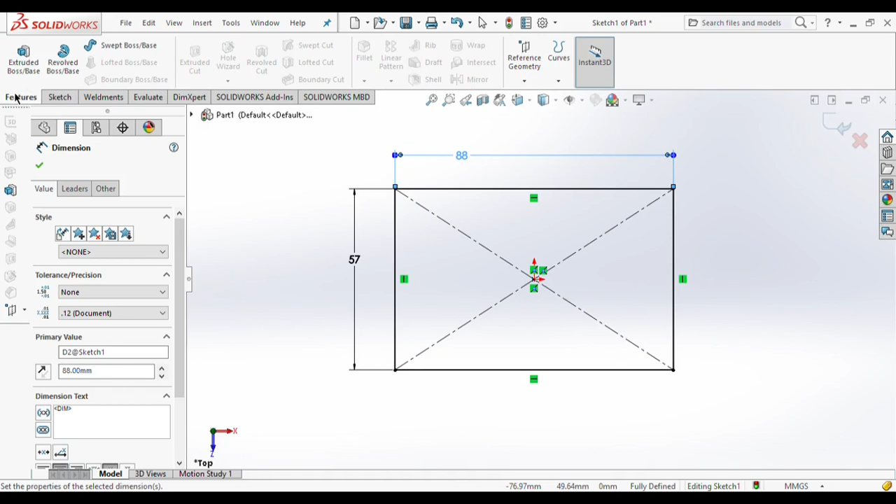Select the top plane, normal to, go to sketch option, go to corner rectangle, draw the rectangle, go to smart dimension, give this dimension as 57 mm, give this dimension as 88 mm. Now go to features option, extrude boss and extrude it up to 10 mm.

Click on OK. Now go to this surface, normal to, go to sketch option, draw two circles on this surface, give the smart dimensions to this circle: the bigger circle as 55 mm and smaller circle as 30 mm diameter.

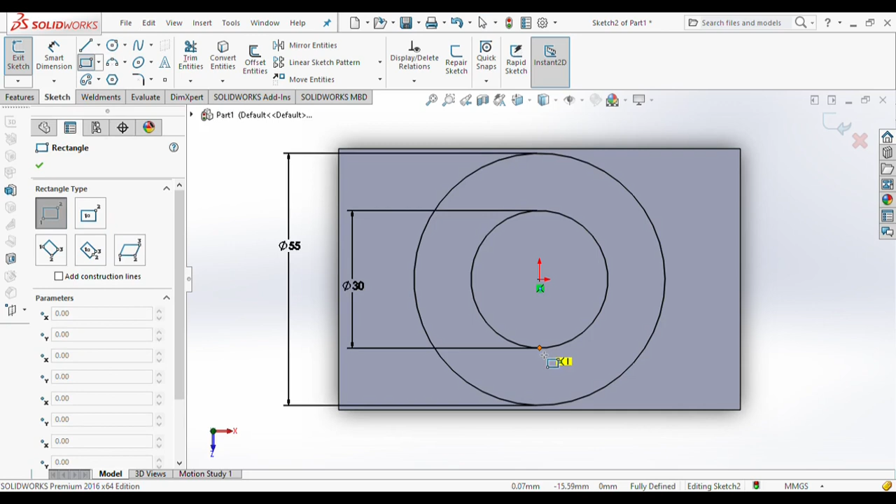Click on OK. Now you can see the slot which is for the key. So for making that slot, go to the corner rectangle, draw the corner rectangle on this smaller circle, give the smart dimensions as 3 mm from all the sides.

Now select this line and this line, give the relation as equal to. Now go to the extend entities option, which is below the trim entities option, extend this line up to the circle. Now go to trim entities, trim this part and click on OK.

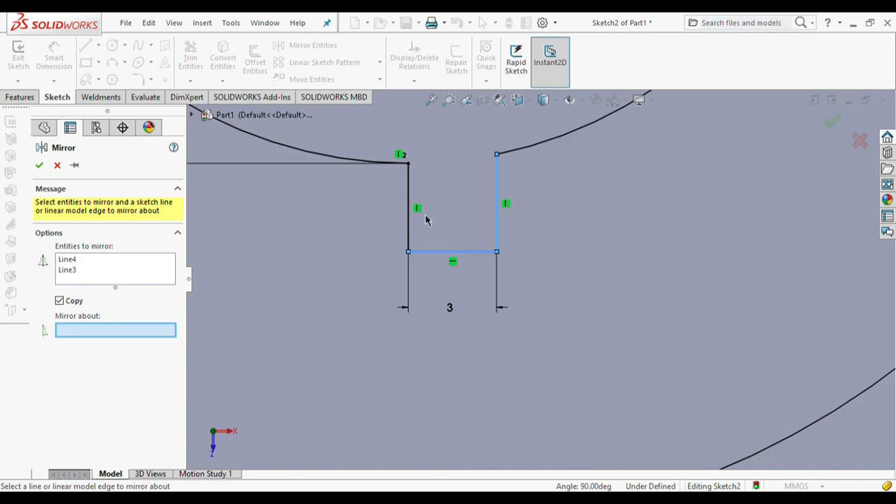Now go to mirror entities, mirror these two lines about this center line. Click on OK. Now go to trim entities option again, trim these two parts, click on OK.

Go to features option, extrude boss and extrude this up to 38 mm. Click on OK. So now we have to draw the flanges.

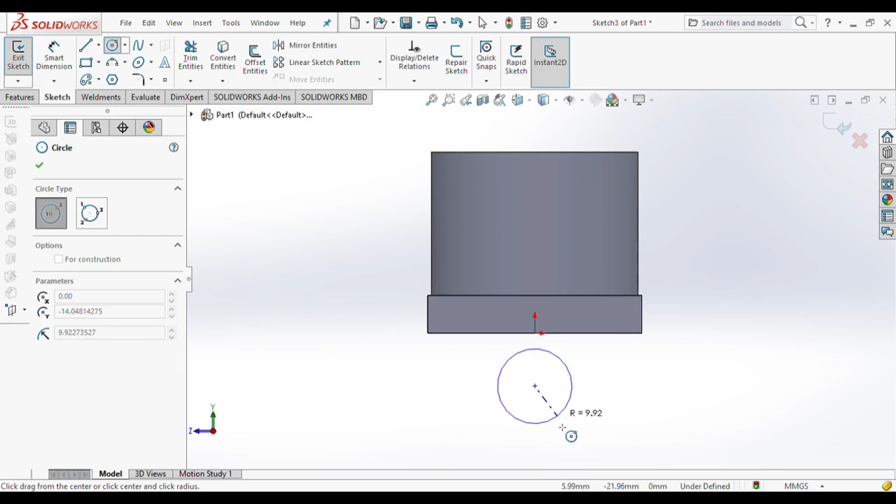Go to the side, normal to, go to sketch option, draw two circles at some distance from the origin. Go to smart dimensions, give the bigger circle diameter as 30 mm and smaller circle diameter as 16 mm, and the distance between the center of circle and this edge as 18 mm.

Now draw two lines which are tangent to this circle. To make this line tangent, select this line and the outer circle and give the relation as tangent. Similarly with this line and the circle, give the relation as tangent.

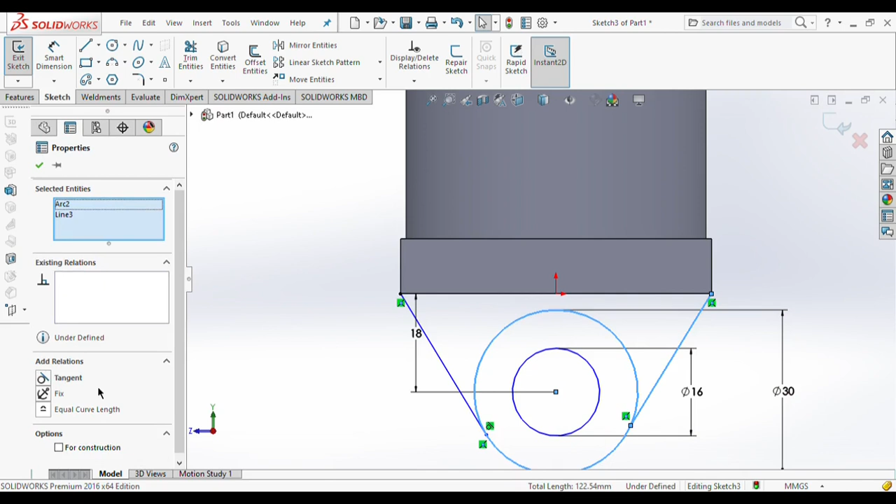Now make this center and origin as vertical. Go to trim option, trim this part, click on OK, go to features option, extrude boss, flip the direction and extrude up to 16 mm.

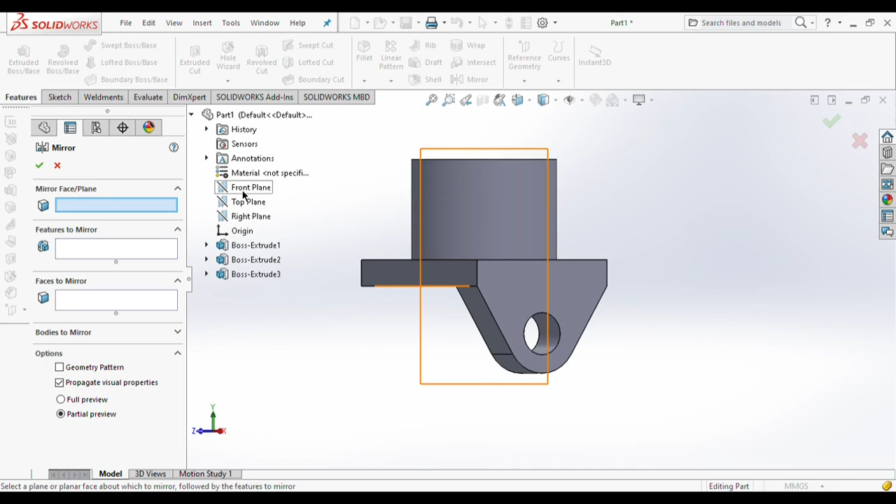Click on OK. Now we have to mirror this body to the other side. Go to mirror option, select the plane which is at the center of this component, mirror the feature, click on OK, and this way your mirror gets generated over here.

Now save this file as fork and move to the next component, the center block.

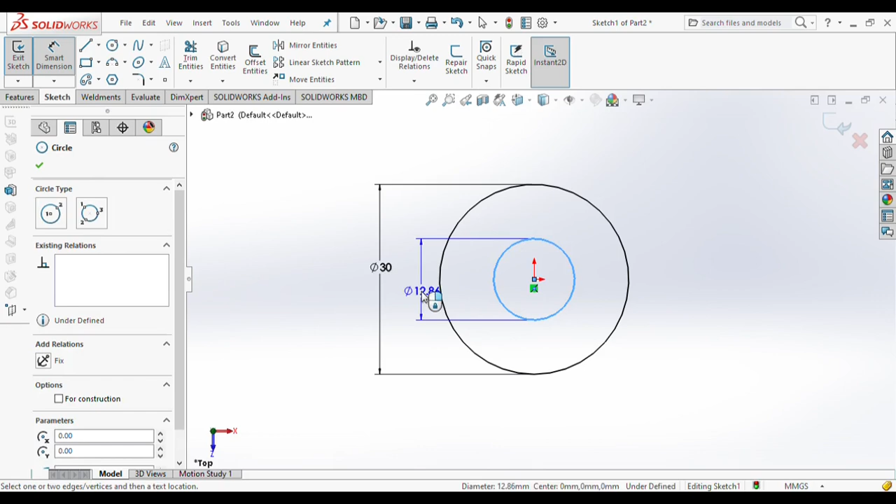Now for making the center block, go to top plane, normal to, draw two circles, give the dimensions: the bigger circle as 30 mm and the smaller circle as 16 mm diameter. Now go to features option, extrude boss from the mid plane and extrude up to 56 mm.

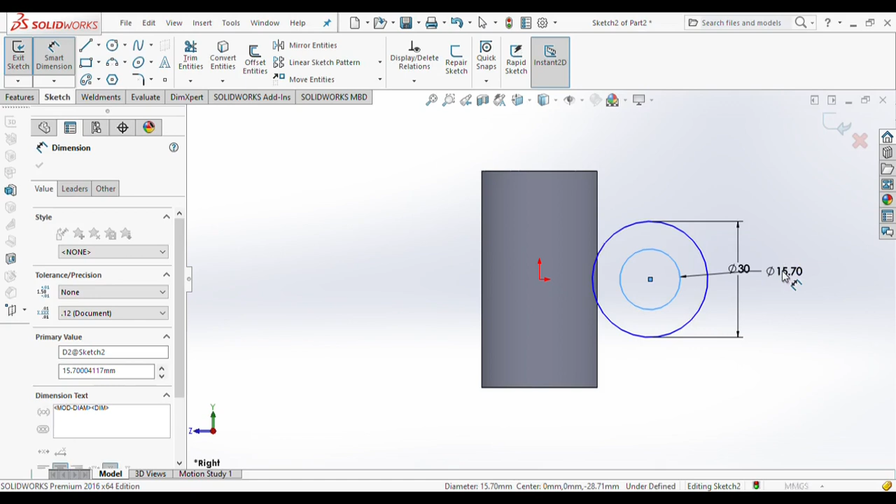Click on OK. Now select the right plane, normal to, go to sketch option, draw two circles at some distance from the origin. Go to smart dimensions, give the bigger circle diameter as 30 mm, smaller circle diameter as 16 mm, and distance between the center and origin as 24 mm. Click on OK. Go to features option, extrude boss, extrude from mid plane up to 56 mm.

Now at last we have to give the fillet between these two joints. Give the fillet of 5 mm diameter and click on OK. This way your center block gets completed. Save this file and move to the next part, that is the pin.

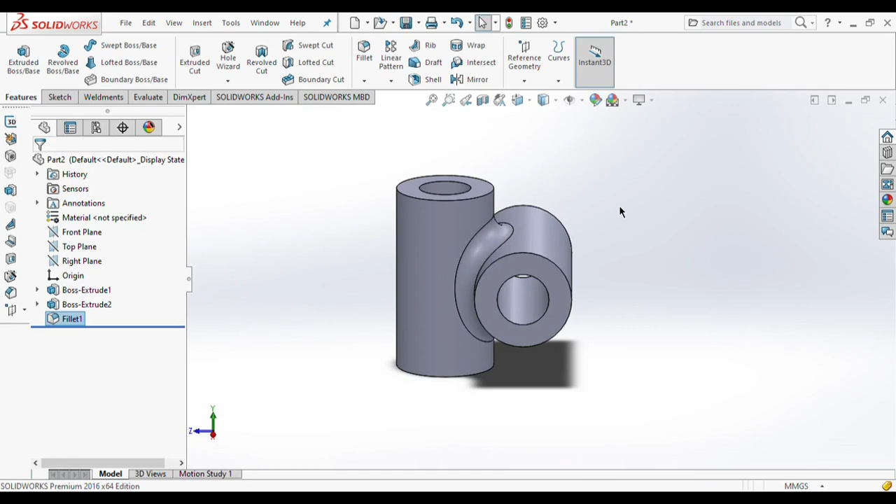Now as you can see, the pin is circular in shape, so we will revolve boss it. Click on the front plane, normal to, go to sketch, draw the center line from the origin, draw the normal line, give the outline to the pin.

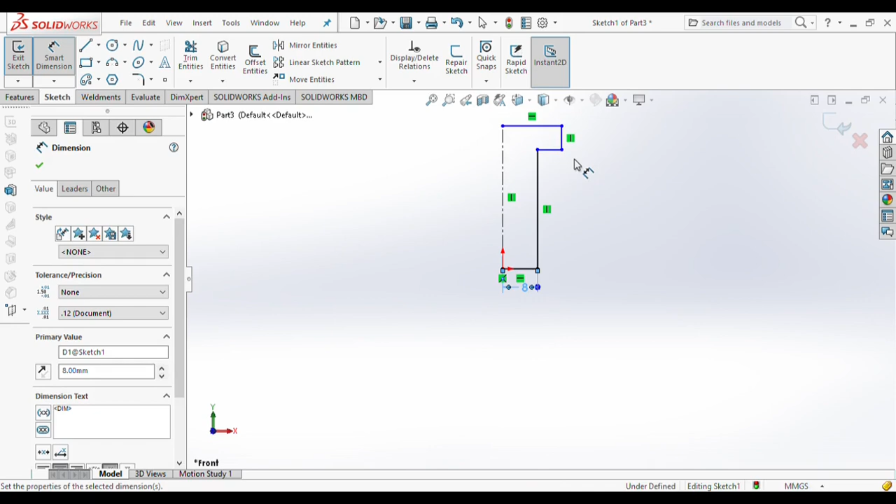Now give the smart dimensions: 8 mm, 10 mm, this line as 100 mm, and the top radius as 12.5 mm. Go to features option, revolve boss, and this way your pin gets generated. Now you can see there is a hole at the bottom of the pin.

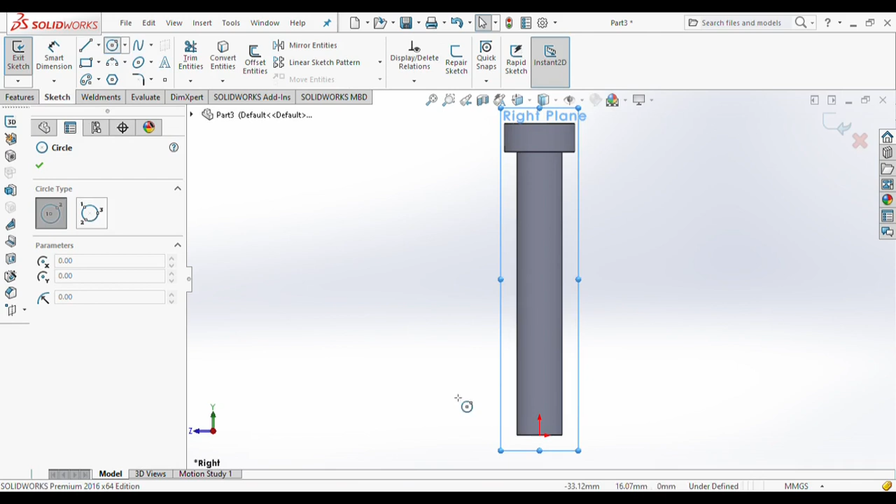For making that hole, go to right plane, normal to, go to sketch option, select the circle, draw the circle at some distance from the origin, give the diameter as 3 mm and the distance from center to origin as 6 mm. Select the center of the circle and origin and give the relation as vertical. Now go to features option, extrude cut, and select through all both. This way your pin gets completed.

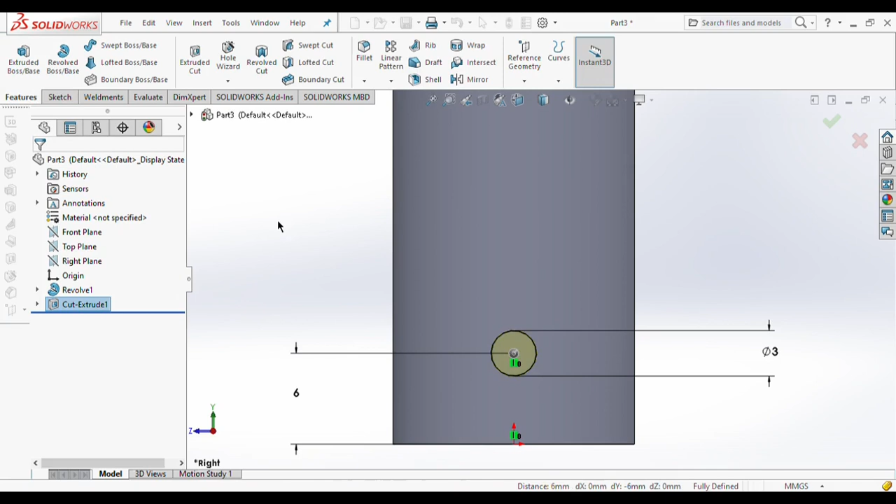Now move to the next part, that is the collar. For making the collar, select the top plane, normal to, go to sketch option, draw two circles, go to smart dimensions, give the bigger circle diameter as 25 mm and smaller circle diameter as 16 mm. Now go to features option, extrude boss up to 12 mm.

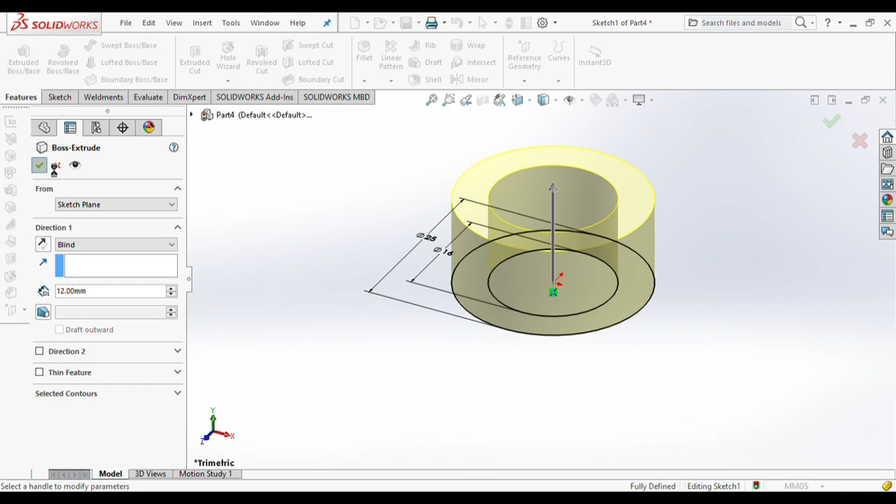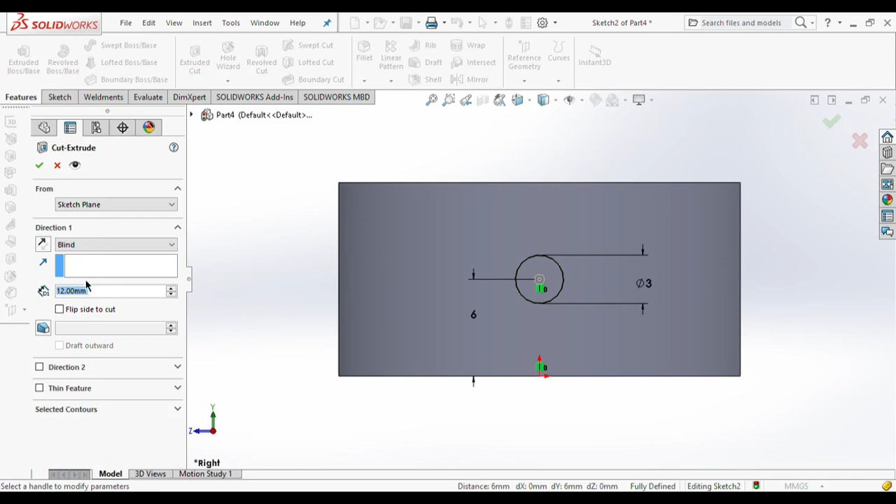Now you can see there is a hole in the collar. Select the right plane, normal to, go to sketch option, draw the circle above the origin, give the diameter as 3 mm and distance from the origin as 6 mm. Click on OK. Now select the origin and center of the circle and give the relation as vertical. Go to features option, extrude cut, and select through all both. This way your collar is generated.

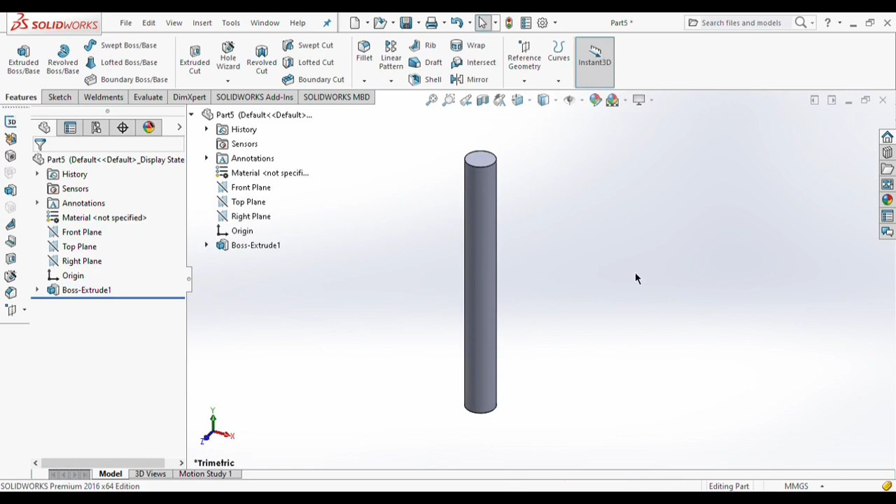Now save this file as a collar and move to the next part as small pin. For making the small pin, go to top plane, normal to, go to sketch, draw the circle of 3 mm diameter and extrude it up to 27 mm from the mid plane. This way your small pin gets completed. Now save this file and move to the assembly part.

For making the assembly, click on the new option, click on the assembly, then OK. Now browse all your parts from this option. Just fix this center block and place the other parts at some distance. Now duplicate this part four times, just press the Ctrl key and move this part to the other side. Similar with this, and similar with this too also.

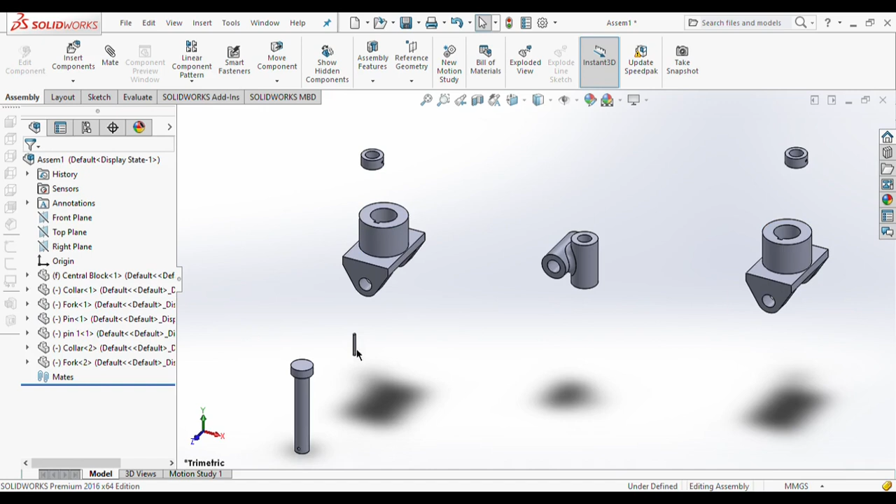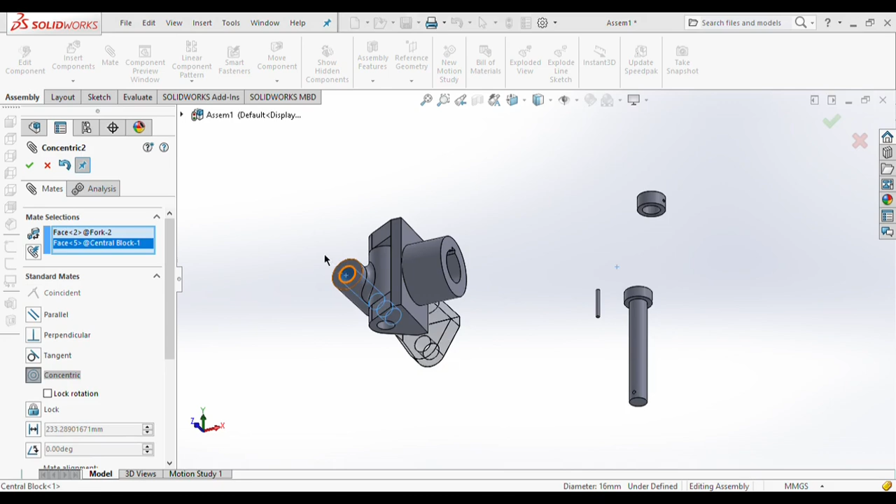Now go to the mate option, select this internal diameter and this diameter, click on OK, click on this surface and this surface, click on OK, adjust this. Then similar with this body also, internal diameter of fork and internal diameter of center block, and this surface and outside surface of center block, then click on OK, adjust it.

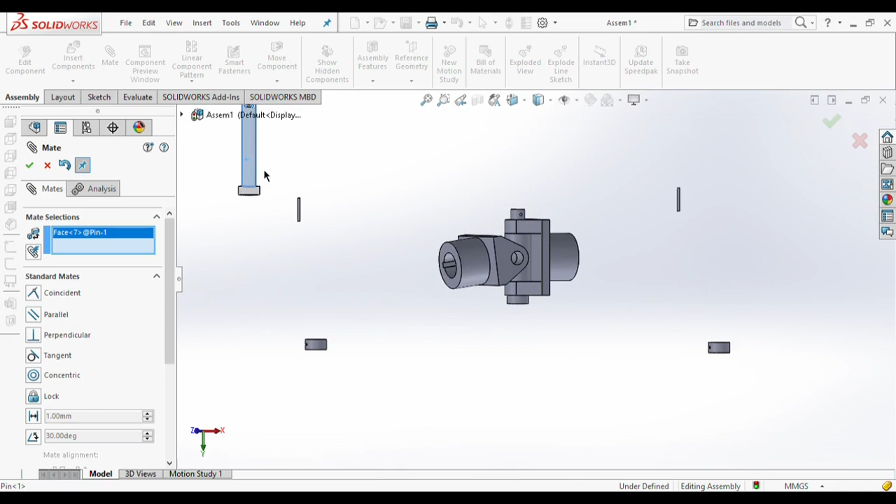Now click on this pin, outer diameter and internal diameter of center block, click on OK, select this surface and the below surface of the fork, outside surface of the fork, click on OK. Now similar with this pin, select the outer surface of this pin, internal surface of this fork, click on OK. Now select this surface and this surface of pin, then click on OK.

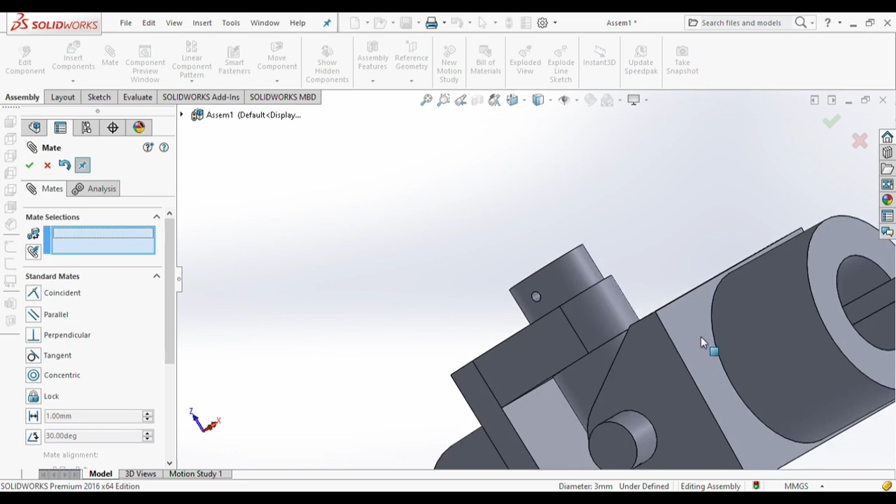Now select the collar internal surface and outside surface of pin, click on OK. Select this internal diameter and this slot and click on OK. Similar with this collar also, the internal diameter of this collar and outside diameter of this pin, click on OK. Now select this slot, internal diameter and the internal diameter of this slot, click on OK.

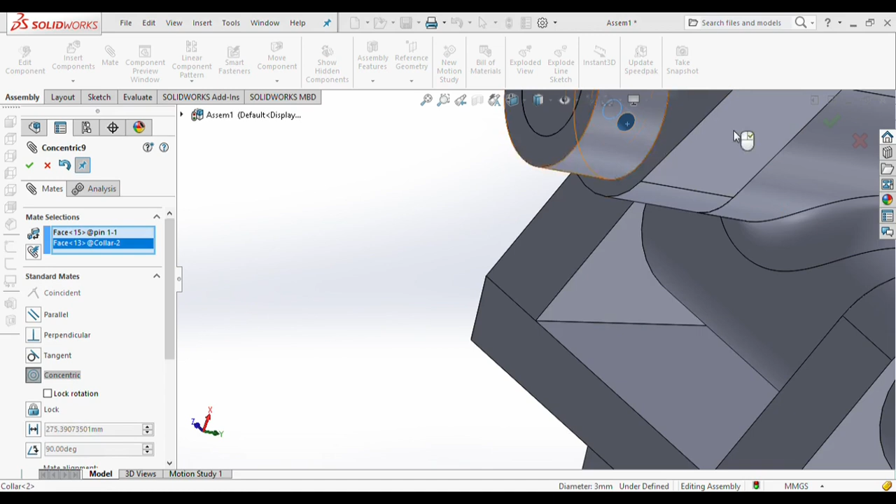Now at last with this small pin also, click the outer surface of this small pin and internal surface of this pin, click on OK. Select the upper surface of this small pin and outside surface of this collar, flip it and click on OK.

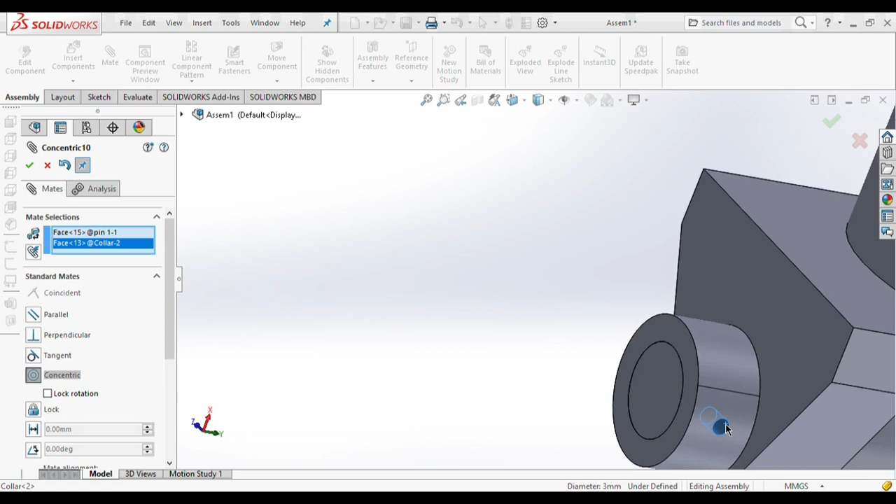Now select this outer surface of this pin and inside surface of this collar. Select this outer surface of this small pin, inside surface of this collar, click on OK. Now select this top surface of pin and outside surface of this collar, click on flip option and then OK. Now exit the mate option. This way we have completed the design and assembly of the universal joint, which is called universal coupling.